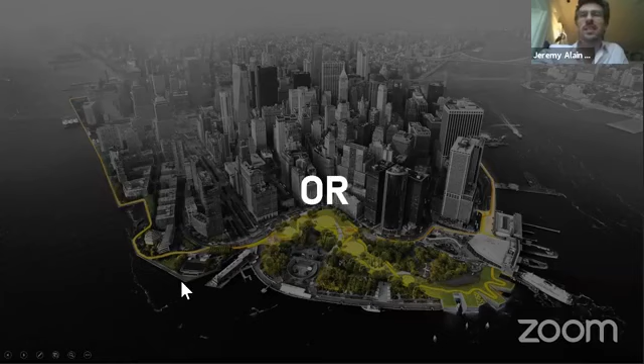A subtitle for the talk is also Trolling Robert Moses. For those who aren't familiar, Robert Moses was one of the most seminal figures in New York City planning for most of the 20th century. He had or created for himself almost singular power and built all of the highways, public housing projects, and major complexes like Lincoln Center or the World Expo site. He really shaped New York in that 20th century model, which had its own set of values.

Through the infrastructure work we've been doing, we're constantly finding ourselves bumping up against those values, able to question them and find ways to rethink some of the mistakes made in the 20th century, working towards a new set of values. So Robert Moses keeps coming up over and over again, you'll see through the projects. It's been kind of fun to have that dialogue in a way through history.

The kind of planning that Robert Moses and much of the 20th century produced led to a lot of economic growth and housing of population, but it also exposed us to vulnerabilities we deal with today. The coastal highways and land reclamation completed in New York City over the last decades and centuries are exactly the things that today expose us to the climate risks we saw with Hurricane Sandy. So in our infrastructure work, or what we call social infrastructure, we're always finding ways to deal with both urban or social issues and these more pressing infrastructural issues at the same time, in a single package.

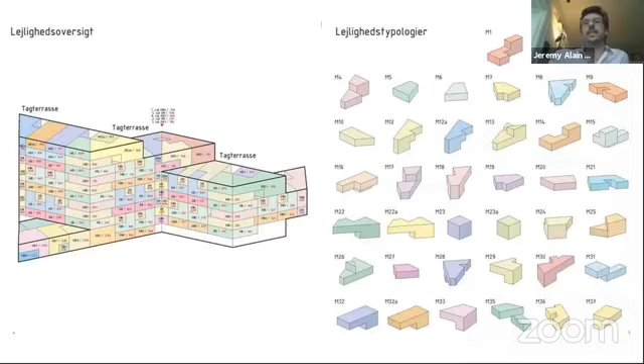In Copenhagen, the office has also had the chance to build off the really communal and social ethos when it comes to public space that exists in Denmark. Early projects like the harbor bath were celebrating the environmental progress of a cleaner harbor and bringing people out to it for recreation. Even projects like the VM house or the mountain, where middle income housing was looked at in a way that great variety and individuality could be accommodated or expressed in layouts and apartment variety. The public spaces or semi-public spaces, even within a building, really express and accommodate the individual or the family unit.

Projects like the 8 House, which really bring urban life up into the building, here as a 3-dimensional street, where a real strong sense of community is created in what might otherwise be a more kind of sterile or generic housing block.

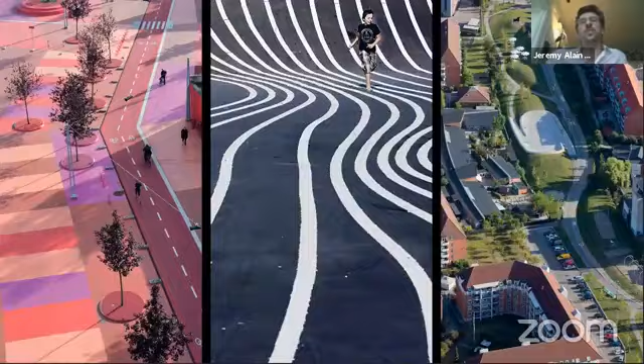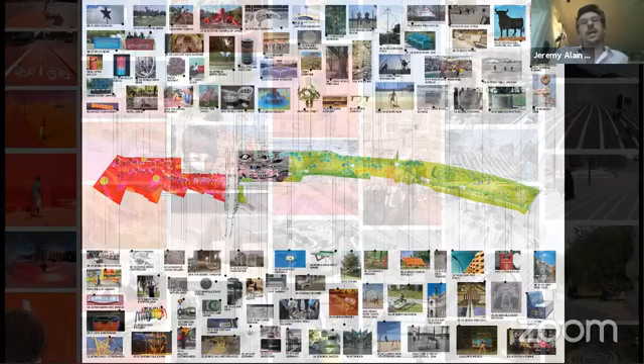Projects like Superkilen, where a disused railway line was to be converted into a park in one of the most diverse neighborhoods of Copenhagen, Nørrebro. The strategy was to divide the site into a series of zones, but within those zones, work with the really diverse, more than 100 nationalities that live in the area, and actually crowdsource urban furnishing so that benches, lighting, signs, bike posts, playground equipment, all these things end up representing a more diverse constituency than one might normally associate with a Danish park. So fountains from Morocco, palm trees from China, signs from Russia, and so on.

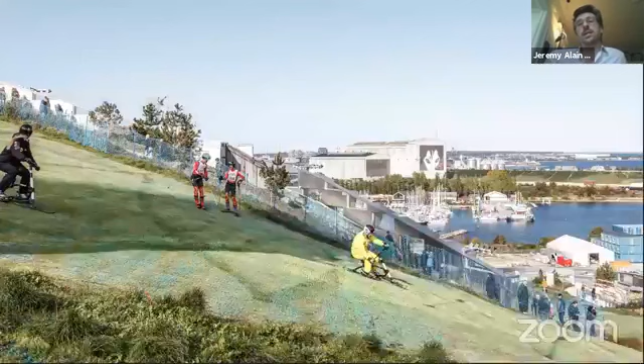And this has kind of scaled up in recent years. This was a competition that was actually won, I think, when we first started in New York in 2010, and it was just completed this year. This is Copenhill, where we were invited to build or basically beautify a forthcoming waste-to-energy plant that would be processing most of Copenhagen's trash. I think this is a really clear example of the idea of social infrastructure, where what would normally be a blight on the city was turned into an opportunity, and the city was really invited to participate in the processes of the plant. So a ski slope is placed on top with a black, a blue, and a green slope, and it's become an all-weather, all-season skiing and snowboarding destination for Denmark, which has snow but no mountains, including also the world's tallest climbing wall.

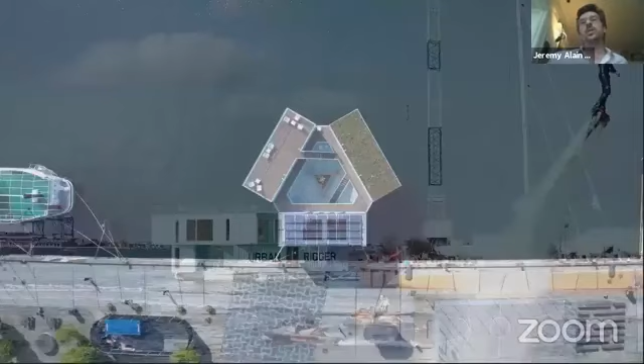Just adjacent to Copenhill, we've been working on floating affordable housing for students with the urban rigger, where a series of shipping containers are prefabricated at shipyards in Poland or in China, towed into place, and through photovoltaics, seawater cooling, and wind capture are creating very sustainable and also very affordable housing. These are about 750,000 US dollars per rigger, which each have about 12 units. Construction cost, so quite affordable, but also incredibly high quality in terms of the living spaces. And this is being scaled up within Copenhagen now, where a series are being built.

So I think that this kind of testing ground of Denmark, where a communal ethos and public space are really valued and are able to be executed, has been a good background for us as we've entered New York City, where it's been a little bit more of an uphill battle, but it's also been kind of fertile ground for real innovation, I would say, in rethinking the way the city and the way in this country infrastructure is built.

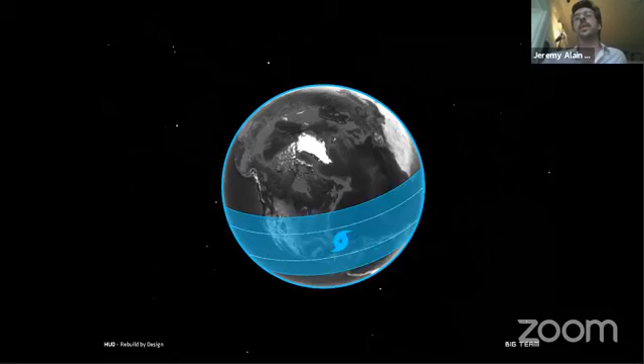So the first project I'm going to share for New York City was conceived in the wake of Hurricane Sandy. It deals with climate change as its primary challenge, and it's called the Big U. The competition was conceived in the wake of Hurricane Sandy, where we realized that the hurricane belt, which traditionally has been more in the equatorial region, has been expanding northward. This means that hurricane tracks in the last few decades are increasingly coming further and further north. So the Northeast megaregion, which has tens of millions of people in it, and hasn't really been designed to take on these kinds of hurricanes, is more and more having to deal with them.

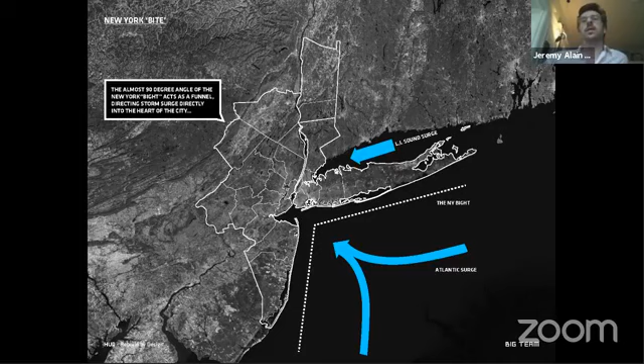This is the track that Superstorm Sandy took in 2012, with its impact on Washington D.C., New Jersey, New York, which you can see here, and Boston further north. In New York City itself, the configuration of the coastline we call the New York Bight really channels Atlantic storm surge into this 90-degree funnel, as well as having storm surge come from the Long Island Sound. So it really puts a huge amount of the city at risk, just about 50% of the city's developed area.

During Hurricane Sandy, we saw about $20 billion worth of damage within the New York metro area. Physical damage to our infrastructure, private property, public property, but also to our economy and to our social fabric.

Both during the day and at night, you can see really the dramatic change here, where the city was shut down for weeks. And there's still, particularly in neighborhoods like the Lower East Side, the Rockaways, Staten Island, there are still public housing projects which have not yet recovered. There are subway tunnels which have not yet recovered. So really a big issue for New York.

So in the wake of this, President Obama and the HUD secretary at the time, Shaun Donovan, decided that they would hold a design competition that would take a portion, $1 billion of the $50 billion that was appropriated for Hurricane Sandy recovery, and put it towards a competition geared not towards building back what there was before, but building back better.

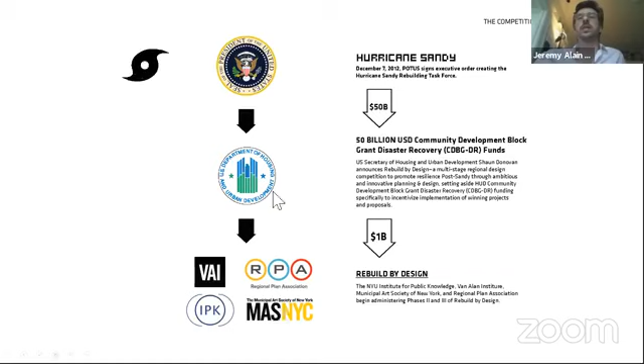This was administered by the Department of Housing and Urban Development, in partnership with a number of local nonprofits. The 10 teams that were selected out of the first stage of the competition, where there were about 160 entries, all had different focuses. Our focus was really high density urban places centered in New York City.

Our work started with this area that was dubbed SOPO after the event, south of Power, where basically south of 34th Street is everything that went dark when the 14th Street substation blew. That's the shot that Iwan Baan captured from his helicopter ride.

If you look at that same area, you'll see that essentially it started in the 17th century with the Dutch and then the British, who began a program of land reclamation, which concentrated land towards the harbor for economic development and industrial activities. But about 50% of the land area now, that same profile, is now at about 6 feet above mean sea level, which means it is today our floodplain. This is the 2050, 100-year floodplain for New York City. North of that, you get high cliffs. But really, this area is where all the land reclamation took place in the marshes, and that's why it's at risk today.

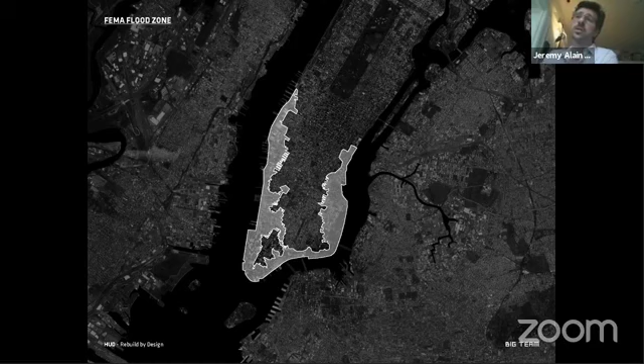So the Big U really started with just the identification of this geography as a place with a lot of risk and also a lot of exposure, given that there's so much density of cultural, economic, and other assets here.

The city had been looking at some kind of flood protection for this area, but our big worry was that given the way infrastructure is typically built, usually it originates from the engineering or the government sector, and this means it usually is directed towards a single purpose. For us, the construction of 10 miles of flood protection infrastructure around New York City would be a disaster of another kind if it resulted in a uniform solution that was purely engineered and that would serve to cut off the waterfront from the city.

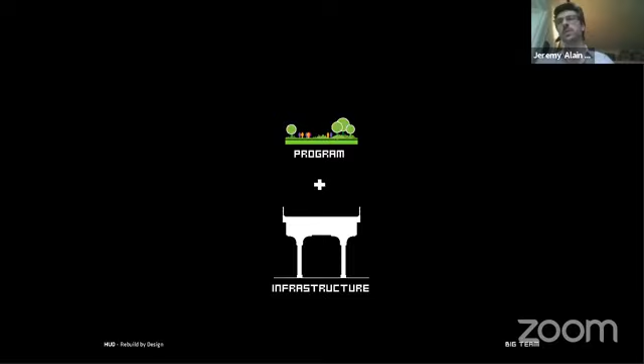The High Line, of course, is this often referenced project, but it's a pretty clear example of a recreational or social program being hybridized with a piece of infrastructure in a very narrow footprint. In this case, as a retroactive measure, the train viaduct that the High Line was built on was decommissioned before it became a park. So our question was, can we do this as a proactive thing?

Can we build flood protection infrastructure that works at the same time for people, for waterfront programs, and that responds to the diversity of the people and neighborhoods that you find along a waterfront like Lower Manhattan's?

So working with that scale of the neighborhood, we also started to look at the scale of the hydrology. To do 10 miles, which is the total length—about 16 kilometers—of flood protection infrastructure would be hugely costly, hugely difficult from a financial point of view, and from a political point of view, just to get everyone aligned.

So the notion of being able to build up this U in smaller pieces became a really important aspect to the strategy. We realized that we could build it as a series of little U's, almost, that would respond to the different high points along the waterfront where it's easier to go upland.

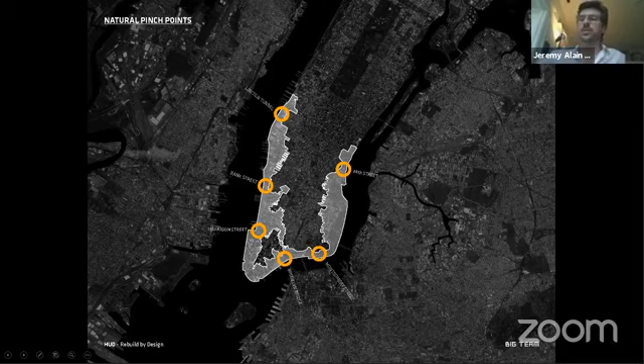Like the hull of a ship, where you don't have just a single shell, but you actually have a series of compartments—this meant we could actually build Big U in pieces, and that each of those pieces could be financed independently, administrated independently, but also designed independently in conjunction with the communities that lie upland, and really respond in a more granular way to the city.

So sort of both unified, but also diverse. At the time, we thought of this as the result of a Robert Moses sort of scale move, but with a Jane Jacobs sort of sensitivity of implementation, or as Bjarke loved to say, the love child of the two. You can say the collaboration as well.

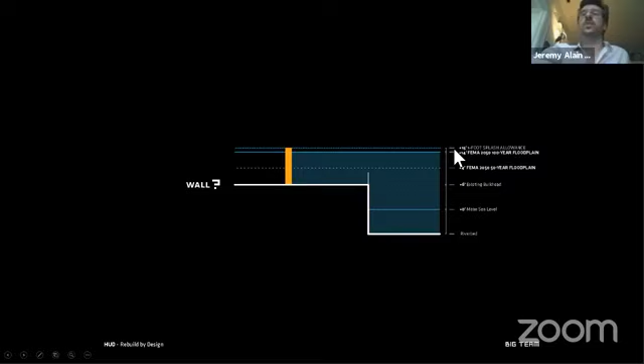From a design point of view, what that meant is that we had to get to a particular elevation, which essentially meant we had to build a wall. I talked about that 6 foot above mean sea level number—that's about average ground level around New York City. To get to the same frequency storm as Hurricane Sandy, a 100-year storm, but also account for sea level rise to the year 2050 or 2100, we have to go to about 16 feet, which is a significant intervention. So our question was, how can we hybridize this with other programs and make it anything but a wall?

To do that, we realized we would need to speak with the people who would be using the waterfront most. So this is where we really departed from our typical toolkit as designers and waded into the world of New York City community politics and government.

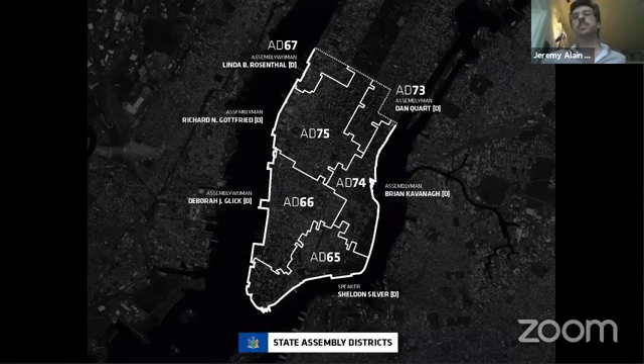We became acquainted with the governance system for New York City, organized into community boards, which are very powerful and have the ability to deny or approve projects—US Congress members, state assembly members, state senators, as well as the community groups.

The Lower East Side actually has one of the densest concentrations of community organizations in the country. It's one of the most well-organized neighborhoods—probably the most well-organized in the country. These groups have a long history and a huge amount of intelligence about these waterfronts, and we realized quickly it would be important to team up with them.

Another consideration which worked in our favor is that most of Manhattan's waterfront is actually publicly owned, meaning New York City government would be able to execute flood protection on its own property. That was a consideration in terms of where we would go for a natural pilot.

These are all the stakeholders we worked with in that first year-long process in 2013 and 14—federal, state, city, community, civic groups, as well as businesses—through hundreds of meetings, briefings, workshops, you name it. Slowly we began to zero in on the east side as a place where both risk and opportunity really coalesced.

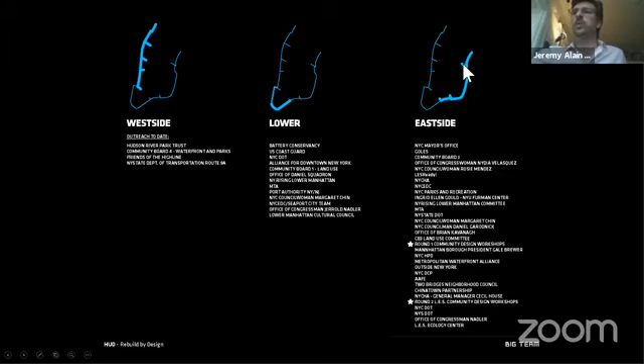On the Lower East Side, you have 130,000 residents, 86,000 of whom are low income, elderly, or disabled. They live in 30,000 public housing units, one of the single biggest concentrations of public housing in Manhattan. The floodplain here is very deep because this whole area used to be marshland—600 acres, 75 city blocks, notably no subway stations.

This is an area that, due to its public housing, is extremely underserved, both by transit and other public services. Notably, it has the power plant that blew during Hurricane Sandy, which caused everything south of 34th Street to go dark.

And it has 3 miles of waterfront that have actually been super underinvested in, basically over the last half century or more, while other parts of the city, like the West Side, Brooklyn, and others, have had a lot more investment recently.

So we teamed up with a group called Lower East Side Ready, an umbrella group for, at the time, about 40 member organizations—I think it's more like 80 now. It was really a one-stop shop for everyone who had a stake and a say in this neighborhood. We started joining their weekly meetings, and their focus was really on short-term recovery.

Not really knowing what to do, we decided to take the process we use in our office and bring it out into the community. For us, one of the most important tools to build consensus within the office and to make design decisions is the physical model—something concrete, that everybody is looking at the same thing, with less risk of misinterpretation.

So what we did is we built a suite of options, from very basic engineered options to things that would accommodate simple bike paths and seating, to more heavy infrastructure moves.

We talked with the community about the different engineering considerations for different kinds of flood protection. A temporary barrier is, of course, the least disruptive to the urban fabric, but it actually carries 4 magnitudes more risk than more passive, permanent flood protection infrastructures like flood walls or earthen levees.

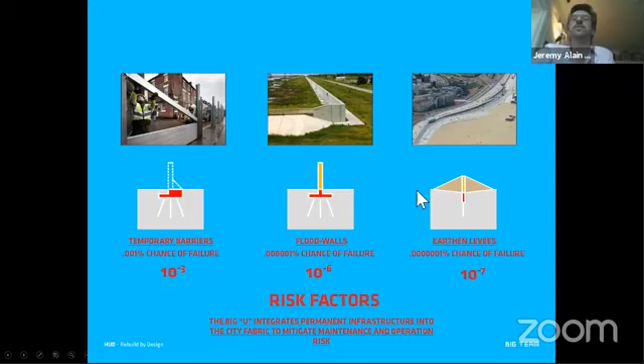We held a series of public workshops, which have continued to this day. These were our first two, on the Lower East Side in 2013. My God, that's 7 years ago.

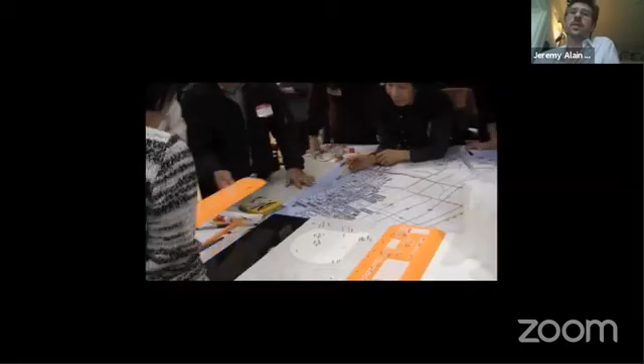We really brought all the options out, and people were so engaged being able to use these tools and wrap their heads around issues. I think planners, particularly in New York City and America, but probably everywhere, tend to be more vague, working with highlighters and post-it notes and more vague ambitions.

I think one thing we bring to these discussions as designers and architects is a compulsion to be concrete about what we're talking about. In a lot of ways, that translates into a heightened feeling of transparency and clarity with the communities we work with, and it's something we try to bring to all of our projects.

But to get back to the Big U, by the end of that first process we ended up looking at a focus scope of 4.25 miles from 23rd Street all the way down to the Battery, split into 3 compartments: Lower East Side, Two Bridges/Chinatown, and the Financial District.

So recently, in 2015, we began work on the first phase of this, which is the East Side Coastal Resiliency Project. It runs from East 23rd Street down to Montgomery Street—2.25 miles of flood protection, which received $335 million from the federal government at the end of this Rebuild by Design competition.

Since then, the City of New York has taken on the administration of the project, and we've been working with the City since 2015 on this stretch.

This stretch is really about taking a park, East River Park here, and elevating it literally and figuratively by creating flood protection that completely rethinks the urban fabric—connections over the highway, creating better connections. We're building 3 new bridges, which will create 60 new acres of parkland for this community while creating a storm surge barrier.

You can see here the connections towards the water, the topography, and the Manhattan Greenway. New amphitheaters and lawns will be tied to the new bridging connections, which will be wider and more generous.

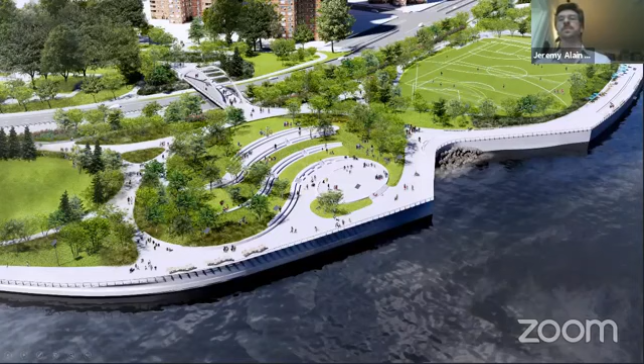We're taking areas where today you're met with fencing and really pushing fields apart, bringing the park right up to the water.

Working with very simple buildings—this is going to be a really robustly detailed public project where we need to work with New York City park standards. We were essentially given a palette of glazed tiles, for example, that we could use for the comfort stations in the park.

And we said, okay, great, we'll use all of them. So we have a subtle wayfinding that happens throughout the park as you move from the south with cooler colors, to the middle of the park—more of a range for the track house, which has locker rooms, administrative spaces, etc.—and then warmer colors to the north with a brick pattern that also works with the existing brick buildings.

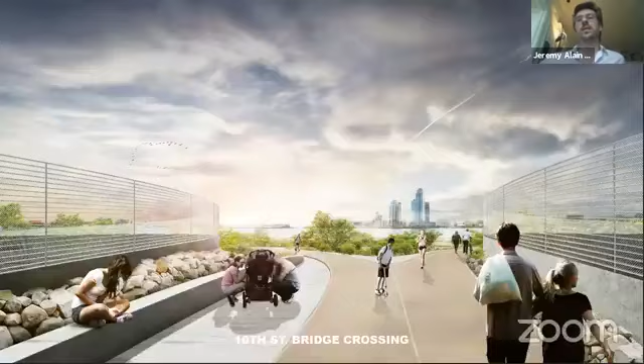We're really trying to bring those bridging connections into the neighborhood, so that where today a bridge entry is actually hidden behind this building, bridge connections become really intuitive and obvious. As we move north, there are other conditions we deal with.

Here in Stuyvesant Cove Park, it's a narrower condition. Solar One is actually going to be the first piece of the Big U that gets built—this is an environmental education center where an existing facility, a simple shed with a solar roof on top, is going to be replaced due to the flood protection work.

We've been able to redesign that facility as a continuous public surface so that classes and groups of kids can be taken up to see the solar roof, and then inside there's environmental education space. You can see here the phasing—the building will actually be built first, and then the berm will be built around it.

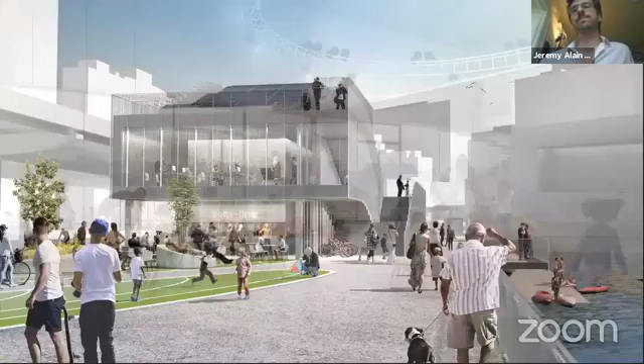So all in all, it's 60 acres here with what we call the park archipelago. The plan of the park is really organized to preserve a lot of the active recreation that already happens in the park—baseball field, soccer field, etc.—but then kind of shrink-wrapped with green public space and better connections across.

This is that full scope from 23rd Street down to Montgomery. And if this works, we couldn't help but put the Game of Thrones soundtrack on it. But this gives you a quick sort of run-through of that stretch.

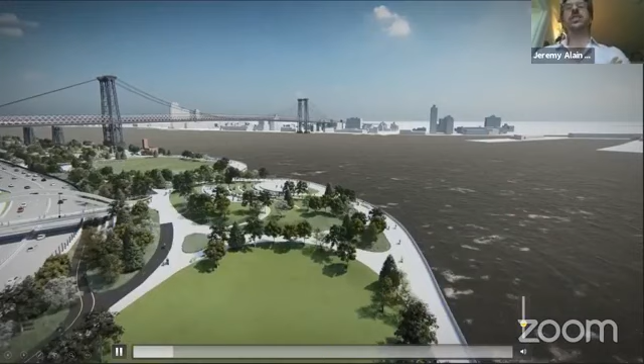So that's the first of the bridges, the Lower East Side Ecology Center and its nature play, the Delancey Street Bridge here. All of this park today is very flat and super underinvested in. We're really going to be raising and rebuilding the entirety of the park, preserving its programs and uses, which we've heard from the community are super important, but trying to infuse other programs with it.

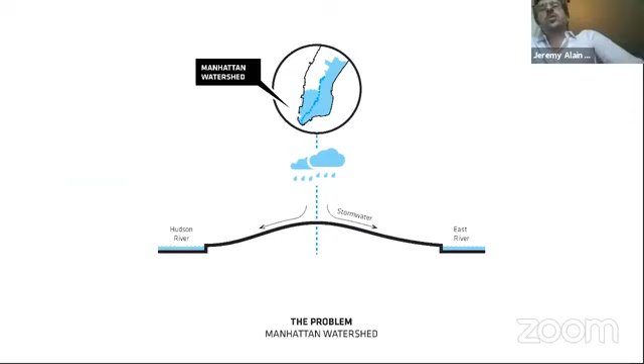Okay, so I'm going to take you on a little side journey here with a guerrilla project that resulted from the East Side Coastal Resiliency Project that I just showed you—a little detour, where stormwater was essentially a big issue that had to be dealt with.

So you have both storm surge coming from the river, but you also have rainwater falling. In the park, essentially a large stormwater tank was planned where, when it rained a lot, instead of trying to get into the river and then being backed up into the buildings, this tank would take a lot of that stormwater, with 13 million gallons of capacity.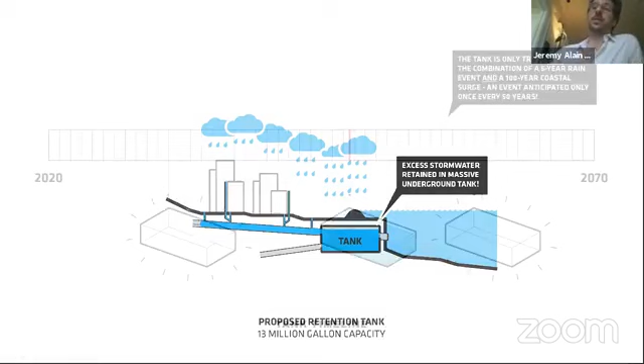So the engineers were designing this, and when we realized that the tank would actually only be activated when you have the combination of two quite rare events—a 5-year rain event and a 100-year coastal event—and that 99% of the time that tank would be empty, we decided that we really had to think of a way to use this multi-$100 million investment and put it towards better use for that 99% of the time it wasn't being used.

So we looked at its size and its location under the tennis courts. We looked at its location in the community, where it's actually quite well positioned in terms of transit. For those of you who know New York, the East Village is also sort of historically a music destination. And the space is just about on par with some of the major performance venues in New York City.

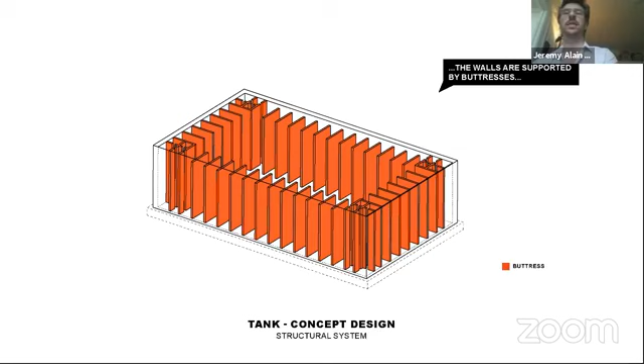So what we said is, if this is the baseline scheme, where essentially a secant wall is being built—a series of walls are being built to support those really deep secant walls—and then a series of columns are being built with beams, which basically creates this waffle that completely obliterates the space.

We said, take that same structure and, with a little bit of surcharge in cost, put it into a suspended structure. For the buttresses, have them stepped so that we can actually introduce stairs.

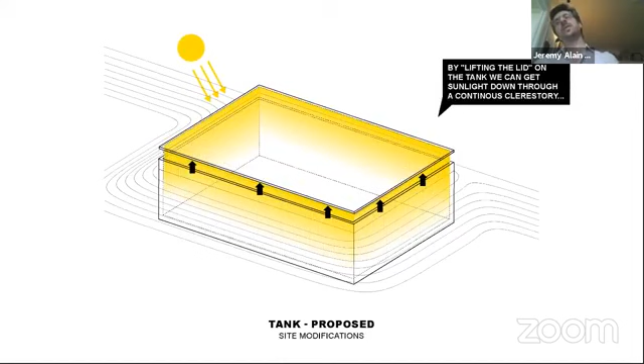For a performance venue of 5,000 people, you need an incredible amount of egress. So we sort of borrowed the Indian stepwell typology to provide the right amount of egress, a series of elevators, submersing the whole thing but lifting the top to get daylight, and then allowing access up to the tennis courts.

This would be the result, a kind of 60-foot deep space, super epic space, which as you approached would have this kind of open and inviting feel.

Within, during the day, it could be used for public and community events like sports for free. Occasionally it could be used for art and culture. But during the evenings it could be used for revenue-generating events that could help provide funding to this park, which is a fully publicly administrated park right now and has no private funding of its own—which, in the rest of New York City, is almost a prerequisite for having a good park.

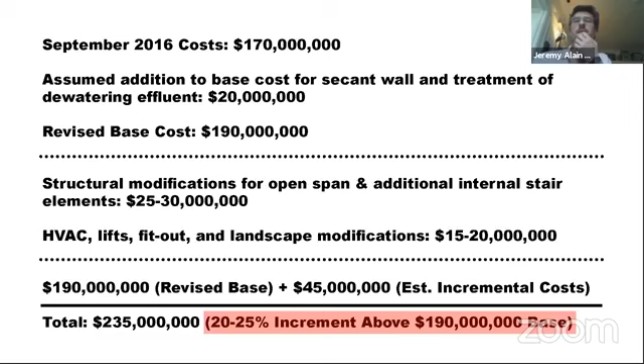So lest you think we weren't serious, we enlisted some of our favorite engineers to do some guerrilla engineering work and costing work. We calculated that it would be about a 20% increment above the original cost of the tank. We thought about operating structures that could operate such a facility and also calculated what their annual income might be based on the kind of events that would be housed. So this was kind of a fun and exciting foray for us.

We actually got a series of musicians in New York City to commit to being on the board of such an institution. But as these things sometimes go, it was eventually decided that the tank, as an engineering solution, would be replaced for cost reasons with incremental improvements over time to the city fabric.

I think in a way our study, which we brought to the attention of some people involved with the project, helped highlight that these few hundred million dollars would be going towards an infrastructural use that was only being activated once every several decades. So the cost-benefit might not make as much sense.

But that aside, with the project on the whole, we are moving ahead. We've just finished construction documents. We'll be going into bidding over the summer. The project is fully funded now with $1.45 billion of city funding, supplemented by $335 million from HUD. We'll be breaking ground over the summer or fall.

We're super excited to begin that work and to have our bridges lifted over the FDR Drive. So that's ESCR, the first phase.

Since 2017, we've also been working on some of the next phases. I'm not going to go into too much depth here, but the phases to the south of ESCR have really been about finding ways to pay for the infrastructure as you build it. So how can you create economic growth that you can then put into the capital costs?

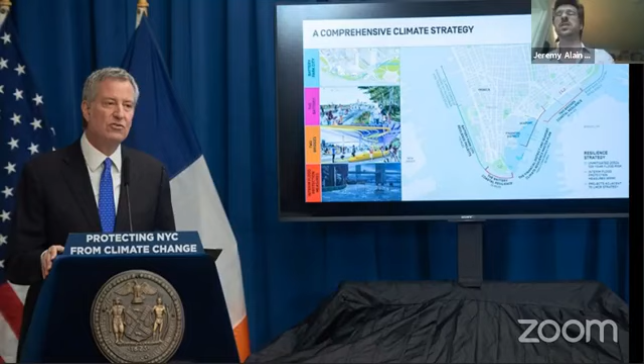We've been looking at the notion of some level of development, and the city has been looking at this as well, being associated with the flood protection infrastructure. Those studies have been continuing over the last few years, but those are longer term in their scope.

So I would say the Big U really was an interesting learning experience for us in terms of the way that the raw infrastructural needs of the city, and what might be seen as headaches or challenges, can be turned into opportunities. And that was a more structured competition.

Recently in our own neighborhood here in Brooklyn, we did the same thing, but on our own, dealing with the challenge of aging infrastructure, which is a huge problem in America. All of our highways and roads were basically built post-war in the 1950s, and they're all coming to the end of their useful life now.

So this is a project called BQP, or BQ Park, which deals with Robert Moses again. He built East River Park and the FDR Highway, which we looked at before, and he also built the BQE, the Brooklyn Queens Expressway, which runs from the Verrazano Bridge all the way up to the Bronx, and runs along my neighborhood, Brooklyn Heights, as this amazing triple cantilever structure, like a bookshelf with 3 lanes on either shelf, and then the Brooklyn Heights Promenade above. It was built in the 1950s, kind of a marvel of engineering.

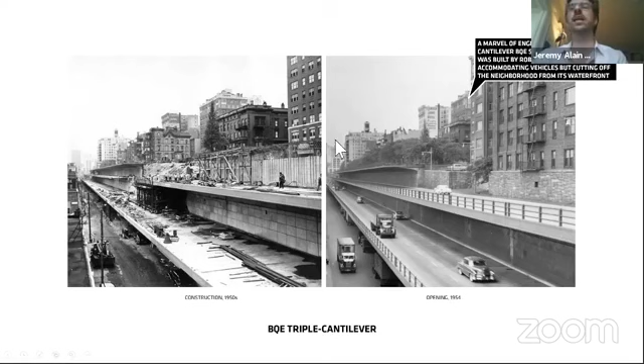So the city came in about a year ago and said, look, we need to repair this thing. We've looked at the ways to do it, and we only see one viable option that we can build within our public right-of-way footprint. And that is to replace the Brooklyn Heights Promenade, this wonderful park, with a 6-lane highway that would be there for 8 to 10 years, and then eventually be replaced with the park again.

This was really driven by the fact that they were looking within their own right-of-way and had to deal with this problem urgently.

Of course, the community, and we're also part of this community, as I said, I live in Brooklyn Heights. A number of us live in Brooklyn Heights. Our office is in Dumbo, just the next neighborhood over.

So Bjarke asked us to look at what we might do differently. How could we find another way or a better way to do this? So we looked at it and we said, okay...

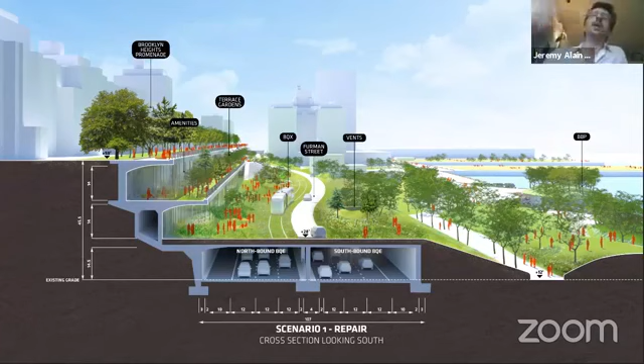And then eventually we could build a park on top of that, so increase the amount of public space that we have. And then take the old highway viaduct and repurpose it to public space, or rebuild it in segments and provide additional parking.

We looked at the phasing that this would entail, sort of building most of it at ground level, and then working with the pinch points, sort of flipping traffic back and forth, and eventually decking over everything.

We put together a pro bono team here. This whole effort was pro bono for a year, where we worked with the landscape architects of Brooklyn Bridge Park to understand what the impacts to Brooklyn Bridge Park would be.

So a totally different and more natural kind of cliffside condition, where today you have this infrastructural gulf between the promenade up top and the park below, where you have to walk basically for 20 minutes to get into the park from where we're standing here. You'd have direct connections straight down.

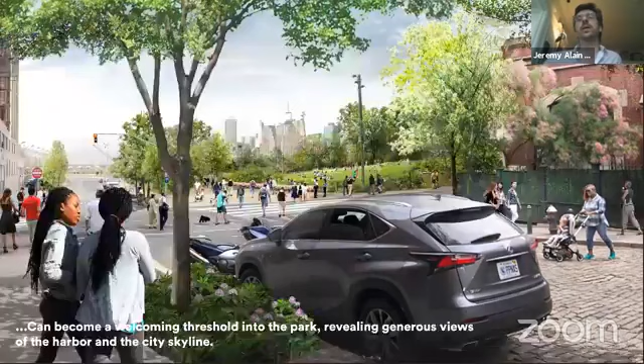A really significant transformation at the ends of the park, where the viaduct, which now casts the entrance to the park in shadow, would be completely removed as the highway dives below ground level. And really ending up with what would be probably the most spectacular park in New York City as a result.

Integrating as well, I should say, light rail transit and other programs.

So putting the pretty picture together was only the start. That took us about 2 months, but we spent the next 7 to 8 months really working through all of the technical issues and preparing a 250-page report describing our approach to each of them, working with our engineering partners

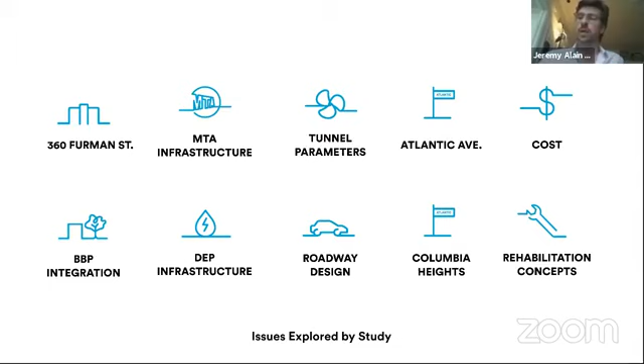What do we do about the sewer interceptor that sits below ground? Can it stay? Actually, yes, it probably can stay. Where do the other things go? And what do we do at the pinch points?

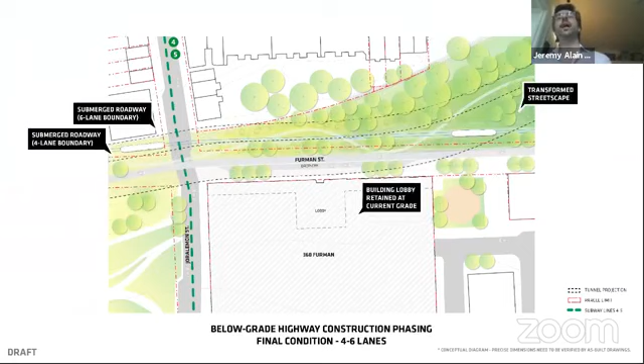How can we phase construction in other areas in such a way that's still feasible and that doesn't impact private property? So all of these really nitty-gritty technical issues were super important in terms of sort of convincing powers that be.

So learning from the Big U and that process, we hit the pavement—1,000+ person town hall meetings, city council hearings, panel discussions with state senators and state assembly members, and other venues—and we just pushed the idea to anyone that would listen.

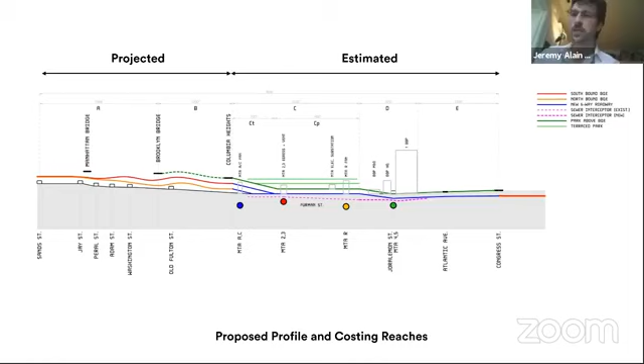And it gained traction. We got front page arts in the New York Times. We ended up also doing a costing exercise with a cost estimator who reached out to us wanting to do some work pro bono. We figured out that this would actually be cheaper, faster, and more feasible technically than what DOT had proposed.

And in February, just before we all went into quarantine, we were met with great news that City Council and its third-party engineers did an independent assessment and determined that ours is one of the only two feasible options for this stretch, ours being the more likely of the two. So that was super exciting for us. It was fun to do this one really on our own.

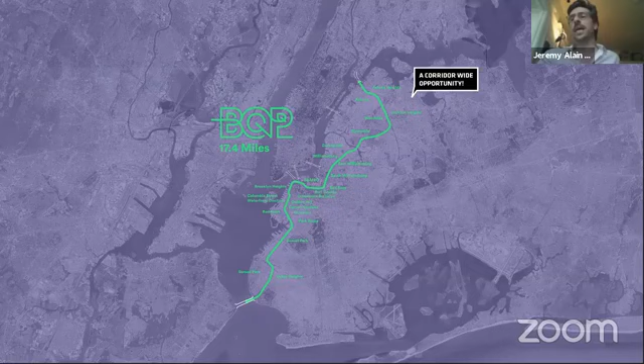Now the community, and the city, and Corey Johnson here, who's the Speaker of City Council and will be running for mayor next, are really thinking about how we can take that thinking and expand it along the whole corridor, which is all going to be aging and coming offline over the next years.

So here's just a little video, I'm hoping this comes through, showing what that transformation would be like.

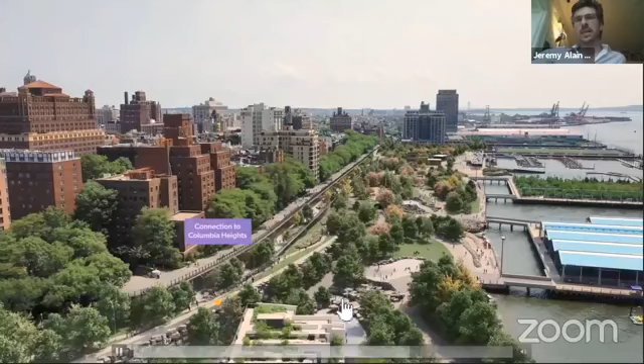This is where I've been spending my quarantine evenings. Here you can see we've taken Furman Street, which runs along the waterfront, and really integrated it, including a whole bunch of new programs and a new identity for this waterfront. There's a website, bqpark.nyc, that you can visit if you want to share it or learn more, and there's also a link to the technical report there.

In the post-COVID environment now, this is one of those projects we think could be a really great candidate for some of the infrastructure spending that our country is thinking about embarking on, as a way of jumpstarting our economy once everyone goes back to work. So more to come, hopefully, on this one.

But really, I think this is an instance where design, and the ability of the designer to make a potential future concrete and planted in people's minds as a possible reality, becomes a really important tool to make change—one that the world of policy, governance, and engineering really hasn't been tapping for the last decades, but that I think they will, and that we, through our own proaction, can push over the next decades.

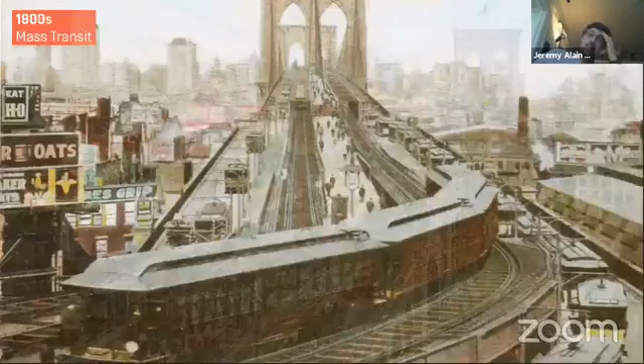If you look at its cross section in the 1900s, you had one lane in either direction for horse carriages, which was the predecessor to the private car. But then you had hundreds of streetcars crossing every day, carrying hundreds of thousands of passengers, and then heavy rail—the predecessor to the subway, the IRT, was running over it as well.

Our good friend Robert Moses, in the 1950s, together with the rest of the country, decided it was time to disinvest in public transit and invest in private car infrastructure. So the amazing streetcar terminals that sat at either end of the bridge were demolished post-war in the 1950s, and you ended up with three lanes of cars in either direction.

What that meant from a traffic point of view—this is a super fascinating chart that was put together by Sam Schwartz, whose name is also Gridlock Sam.

He coined the term gridlock, and he's sort of like a classic New York City traffic figure. He basically did an analysis of the amount of throughput in terms of person crossings, the amount of people that would cross every day on all of the cross East River bridges at their opening, at their peak year, and then in 1989.

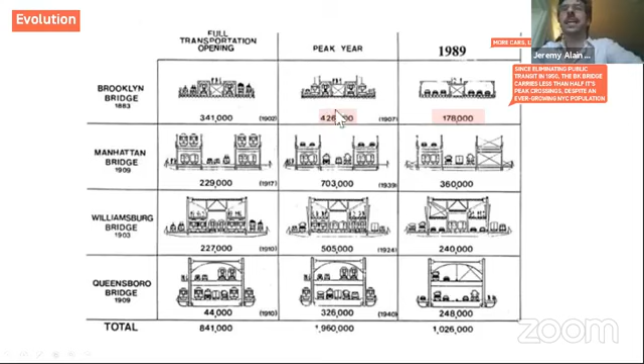So just to take the Brooklyn Bridge, at its peak, when it had streetcars, subway, pedestrians, and horse carriages, it was carrying 426,000 people across it every day.

40 years later or so, with 6 lanes of cars, it was carrying 178,000 people. So less than half, despite a growing city population. And today that number has gone down even more, so you have about 130,000 person crossings a day today.

So what that means is that the bridge has become really good at carrying cars, but really bad at carrying people. And if any of you have come to New York on holiday, you'll know that the bridge, while it's a spectacular sight, is becoming almost impossible to use even as a tourist, and downright impossible to use if you live in New York, if you want to use it for commuting or any other reason.

Ominously, one week into the opening of the bridge, 12 people were killed in the Brooklyn Bridge stampede. And so the city has recently been thinking about what to do about this. One of the first proposals, the only thing that has been put forward so far, is to look at widening that upper promenade. And so the city council speaker, Corey Johnson, basically said, look, we want to see what else we can do here.

The way we approached it was, yes, you can widen the bridge and that'll help a little bit, but we think that there's an opportunity here for something that would really be a bigger statement and a bigger impact on the city. So, well, those of you who have seen Cuomo's COVID briefings are familiar with this PowerPoint template, but...

Cuomo and the city recently, over the last year, have basically passed the first instance of congestion pricing in the city, where you will essentially now have to pay to enter New York City by car.

The city today is the victim of what's called bridge shopping, where the bridges that you see here in red are all tolled, meaning you have to pay for them. But due to sort of arbitrary historic reasons, the three cross river bridges here, the Brooklyn Bridge, the Manhattan Bridge, and the Williamsburg Bridge, are all free.

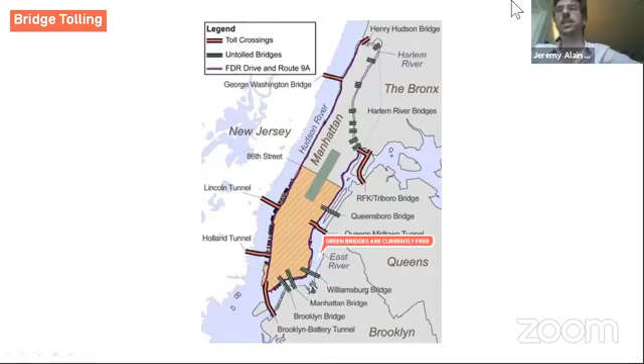So that means that if somebody is trying to get from Brooklyn to New Jersey, rather than take the tunnel, the Brooklyn Battery Tunnel straight to the Holland Tunnel, or rather than take the Verrazano Bridge, they actually go out of their way to go deep into Brooklyn and deep into Manhattan to avoid that second toll. This means a huge amount of traffic going over the Brooklyn Bridge, the Manhattan Bridge, and the Williamsburg Bridge today shouldn't be there. It should actually be going around the city, which means capacity will be freeing up on them.

So together with our engineers, we looked at the capacity of all of the adjacent bridges. The Manhattan Bridge has 5 inbound lanes and carries 3,000 cars an hour, while the Brooklyn Bridge has 3 inbound lanes and carries 3,800. So the Manhattan Bridge is under capacity, and the Hugh L. Carey Tunnel here is under capacity.

And what we basically said is, what if, because the Brooklyn Bridge is such an iconic destination for visitors to New York and because it's so beloved by New Yorkers, what if we really turn the Brooklyn Bridge over to people and biking and other forms of transit? Where would the cars that are on it today go?

So we actually did a traffic analysis, and we found that 30% of the cars that are going over the Brooklyn Bridge today could be reduced due to congestion pricing. 10% could shift to the Manhattan Bridge, 10% could shift to the Williamsburg Bridge due to their excess capacity, and 20% could shift to the Hugh L. Carey Tunnel here.

And the other 30% could shift to subways. This is a hugely densely connected set of neighborhoods by subway, and then all the additional mass transit and bikes, which we could then put on the bridge with cars off of it. So this kind of shows you that same mode shift here.

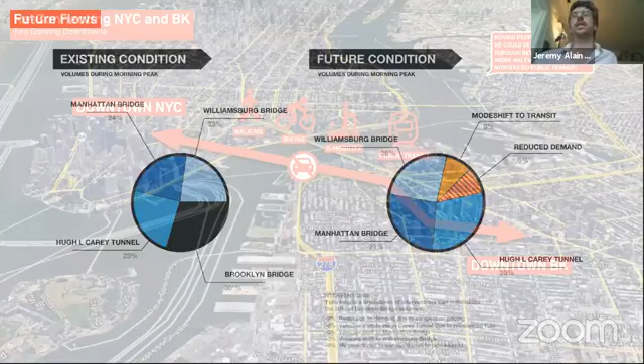Towards walking, biking, e-mobility, which now allows people to go faster with less hassle via bikes, as well as some form of public transit. If we were to do this, we'd be creating a dedicated corridor linking downtown New York City and Manhattan, and its City Hall, to downtown Brooklyn and its City Hall and downtown.

These two downtowns are both growing at a really rapid rate. So if the bridge was originally uniting these two cities, we could really reunite them in the 21st century.

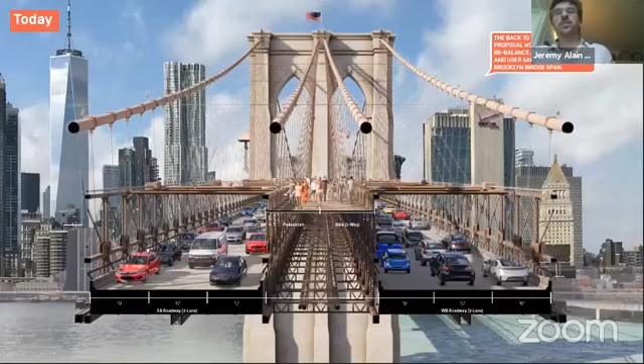In terms of the cross-section itself, this is what you have today: people and bikes share a super dangerous and crowded corridor up here while cars run below. Towards the south and the harbor views, we're proposing to shut down all cars and transition it into a pedestrian plaza. In the short term, that could be done by simply taking cars off.

No new infrastructure would need to be built. But over time, decking, stairways, and rampways could be built linking the upper promenade to the lower promenade.

On the northern side, which is typically more in shadow, you would have space for a biking superhighway, so that New Yorkers can actually benefit from the Brooklyn Bridge and not just our visitors from abroad. We would also have enough corridor for some kind of dedicated mass transit, high-capacity route.

We've been looking at different options for what that would be. In the short term, it could be simple select bus service. Over the long term, it could be autonomous group rapid transit of the type we've been looking at with Toyota, or it could be a more traditional fixed rail, like the streetcar being planned for Brooklyn.

All of these options have to work with the structural capacity of the bridge, which is already at 100% capacity today. So we can't really widen the pathway in any significant way, because our live loads would just go crazy.

And if you take cars off of this bridge, you also end up with a huge amount of Robert Moses 1950s vehicular infrastructure, which can be completely rethought. On the Manhattan and Brooklyn sides, whereas the bridge anchorages used to be really amazing civic moments, what they are now are complete barriers.

So what we're looking at here are all of the rampways that could be removed if cars are taken off the bridge, and all of the public space we would win back—in this case 32 acres of public land on both sides, about five times the total area of the High Line.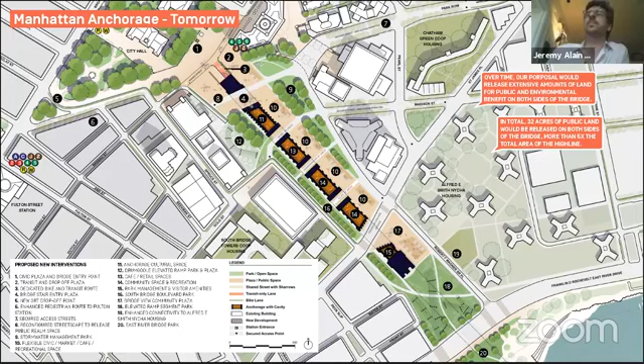This is a really dramatic transformation that is in itself an act of historic preservation, where we're really trying to avoid design, but instead strip away elements and, through programming and circulation, redefine these spaces.

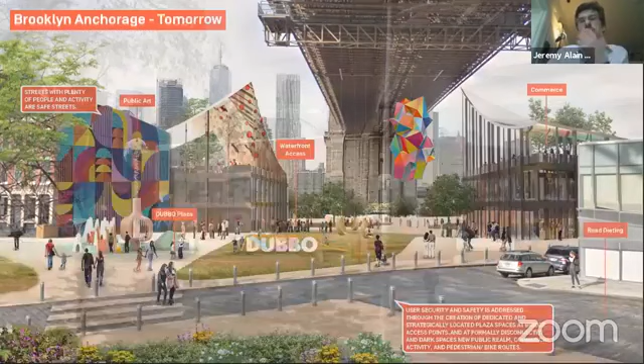On the Dumbo side, similar thinking—this is our office over here. There are city-owned facilities underneath the bridge which are disused and right now serve no purpose except to block the neighborhood from the waterfront. So again, we're thinking about making connections to the waterfront stronger as we rethink our infrastructure here, rather than weaker.

This proposal was developed in response to the overcrowding of tourists and New Yorkers on the bridge. Since we submitted this, the world has been changing, as we know.

An ex-BIG staffer, Meli Harvey, has been mapping all the sidewalk widths in New York, really showing the areas that are difficult to traverse and to practice social distancing in.

The city has started, in a very cautious way, to begin shutting streets down and opening them up to people. From a bike ride I took over the weekend on one of these closed streets, you really have a different vision of New York City—you hear birds chirping, you have kids playing, people walking their dogs.

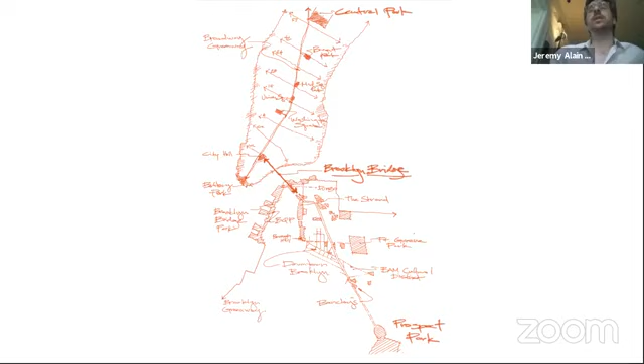So I think what we're excited about now is taking that thinking, which originally we were developing for the Brooklyn Bridge, and expanding it, combining the efforts of the city to build towards a network that can host bikes and walking routes for people to move around safely in the city—both during the recovery from COVID, but also beyond COVID, starting to create a beyond-COVID city, one that's more about nature and more about people.

So just about running up on time, but I want to end here with a bonus project that's on the boards right now. We're still in the middle of it. But through all these projects in New York City, dealing with different sectors of government, from mobility to environmental to economic development, we've been growing our fluency in all these areas of city building. This next project represents a kind of project that's really exciting for us, and that I hope we'll get to do more of over the coming years, which is helping cities that have a fresh start and can start from scratch, thinking about all these systems together in a more holistic way.

So we were invited by the state of Atlántico in Colombia and the city of Barranquilla to look at the growth of their city. Barranquilla is a bit like New York City in the sense that it lies at a super strategic position at the mouth of the biggest river in Colombia, the equivalent of the Hudson River in New York, the Rio Magdalena, and the Caribbean Sea. It's today the fourth largest city in Colombia, behind Medellin, Bogota, Cali. But historically, it's been the gateway to the Caribbean and to the Americas, and its nickname is the Puerta de Oro, the Golden Gate, the Golden Door.

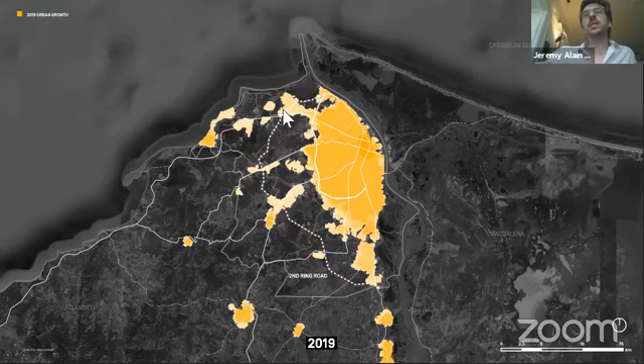But essentially what's been starting to happen is through the 90s, you've started to have explosive growth as the security situation and the political situation in the country improves. The drive to expand and to suburbanize is becoming stronger and stronger. A ring road has basically been built here, and the fear now is that this whole area will be filled in with ad hoc development without a plan in place.

So the governor of this state and the mayor of Barranquilla came to us and asked if we could put together a plan that would look at this area, and this is the second ring road that was built. The city is actually out here, so really an incredible amount of territory to be dealing with, but all privately owned. So if nothing is done, this is actually what will happen: development will happen in an ad hoc manner, and you will end up with sprawl.

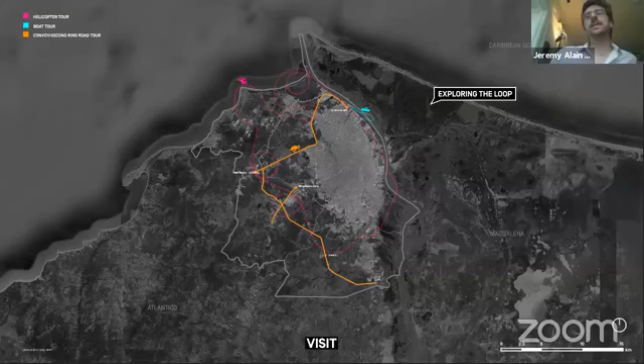So we've been working with the governor, exploring the place pre-COVID, by air, land, and sea, and trying to understand what the aspirations of the different communities that sit along this expansion ring are.

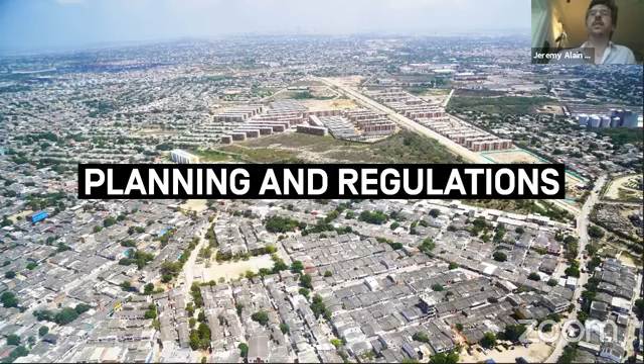This could be a whole lecture in itself, this project, but just to give you some of the highlights and where we're going with it. We're being asked to look at this really comprehensively, both planning, regulations, economic development, industry, commerce, and agriculture, what's the future of tourism, of the provision of affordable housing, public realm, mobility, stormwater infrastructure, environment, importantly, and what are the scales of intervention from the house and the street, the neighborhood, the small town, to Gran Barranquilla and the region that it sits in and its connections to places like Cartagena and Santa Marta and Bogota.

So the kind of framework that we're developing here begins with environmental restoration and preservation as a framework. We've been working with the local university to understand what the most sensitive areas are ecologically and which ones should be preserved.

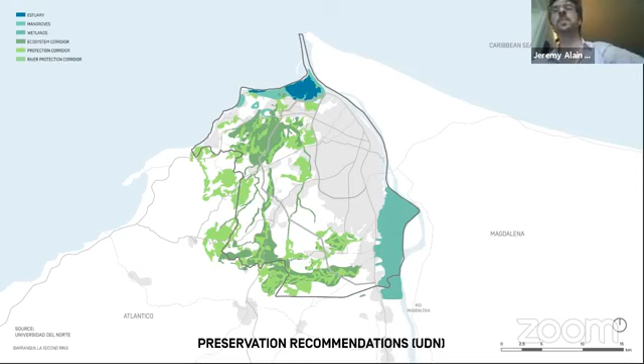And we sort of arrived at this map or figure. So we then sort of formalized these areas into this kind of green banana, a green and blue creek shed here, and then a series of parks that would sort of define a series of central parks between the old city and the new city in the future.

We then connect this sort of more wild green banana here to these smaller, more civically oriented parks with wildlife corridors, ending up with this sort of zigzag of public space, which then becomes a definition of the boundaries of growth.

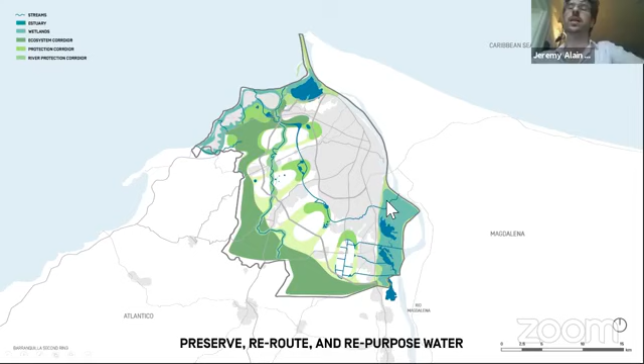Water becomes really important here. So what we're actually proposing is in an area that's going to be increasingly dry, this whole valley, taking the Rio Magdalena and actually rerouting it through our new areas and then discharging it out into the Caribbean so that we can irrigate this whole area that's going to be housing about 1 million people over the next 50 to 100 years. So there's a major piece of green infrastructure, green weave, a major piece of blue infrastructure, which we call the Canal Leon, and then a major piece of gray infrastructure.

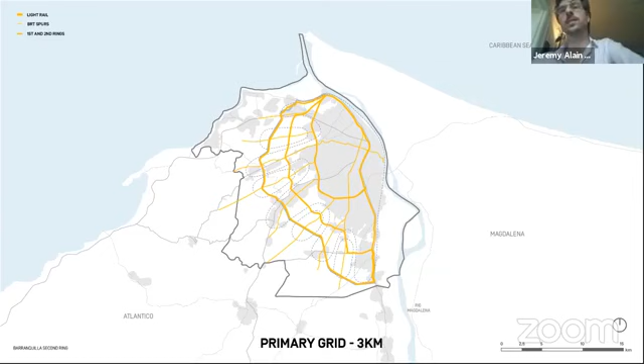So today, if you're trying to get from any of these small townships out here to the center of the city, it takes anywhere from 2 to 3 hours with the existing bus networks. So from a mobility point of view, working with our mobility engineers, we arrived at the notion of a loop as the most efficient way to link the new territories to the old territories, where on a dedicated right-of-way, with a system that would avoid conflicts by going under them or over them to keep speed, you can actually get from any point in the city to any other point within 45 minutes, which would be an enormous boost in terms of access to jobs, access to services, and the kind of economic growth of the city.

So a tour from the north to the south with this weave of green and blue and gray. And then a few of these kind of spaces that we're creating: the green ring, the blue ring, and then the gray ring, both working with the existing waterfront, but also serving at the stations to define areas of density for new growth.

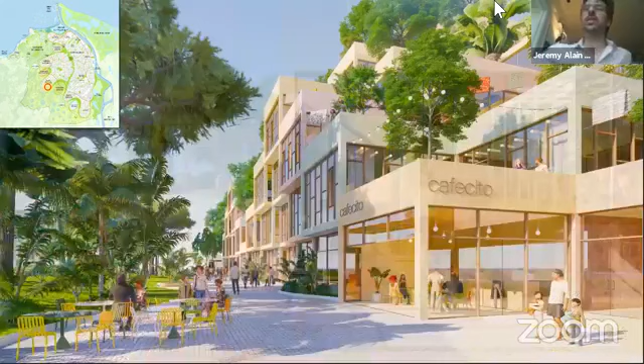And in the end, we thought this might be best expressed through a kind of day in the life, where there's a start in high quality housing somewhere in the expansion zone, neighborhood plazas with bike share associated with schools and daycares and drop-off. People can move around safely on dedicated bike paths, make their way to the Hilo, or the thread, this ring around the city, and in 20 minutes or so, get to any other neighborhood and place of work.

So this has been a really fun and interesting exploration for us. We look forward to working with these guys more.

I think I'm going to leave it there, and I'm happy to open it up to questions. I realize I'm not leaving you with a closing graphic, but I think what all these projects demonstrate is that as designers, there's a lot that we can do today. There's a lot of issues out there, and there are a lot of institutions and governments and communities that are looking for smart thinking at all kinds of scales, and that don't know how to do it. So I think it's really an interesting moment for the design disciplines. I hope to see this work growing in our practice. I know it is already, and I think for the field at large, it's going to be a big part of our future. Thanks.

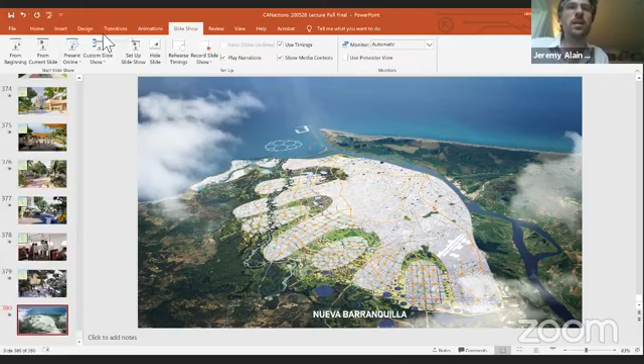So the first question is two questions. One, as you mentioned, New York City has an enormous amount of communities and groups involved in neighborhood activities, which to a certain degree have independence in decision making. Could you elaborate on the most challenging aspect of those communication processes and participatory meetings between existing communities in order to agree on strategic principles? And then a second question, related to that: what types of tools and instruments have you incorporated to engage the community in the design process?

Okay, so I'll start with the challenges. Look, in a city like New York City, any large city, just the number of voices is a challenge to begin with. It's a lot of time and a lot of energy that we spend building those relationships and having those conversations. It's hugely important, it's critical to the work. We can't do it without it.

But it means we have to staff our projects differently. We need to allow for that focus and that time in our teams and in our scopes. So that's kind of on the office side.